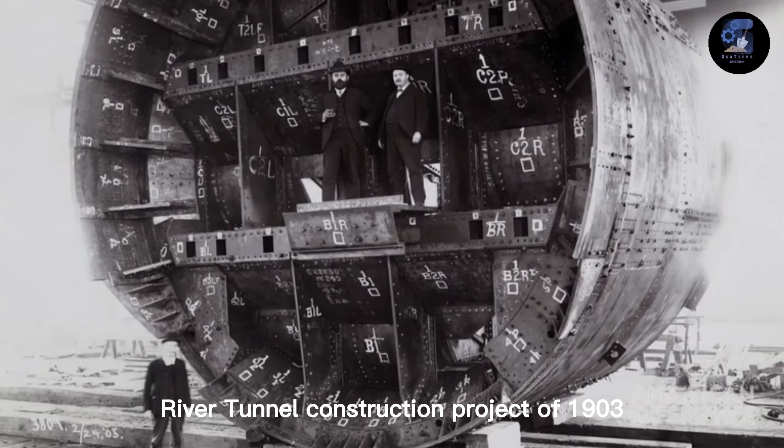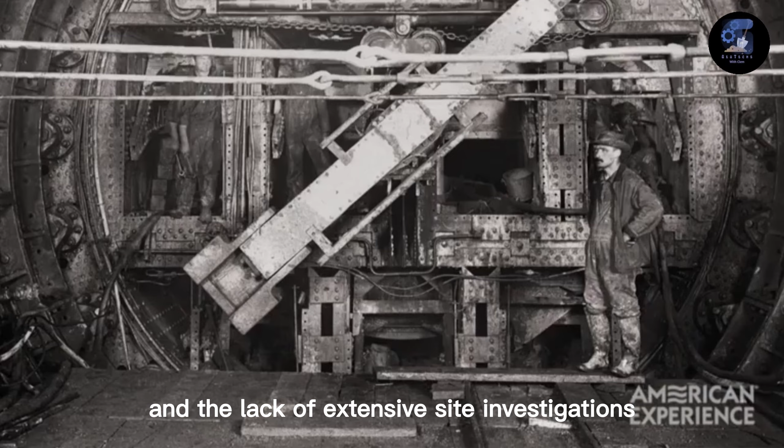This is the East River Tunnel construction project of 1903 in New York. The construction commenced in 1903 and the tubes were completed by 1907. But due to the lack of knowledge of modern-day soil and rock mechanics and the lack of extensive site investigations, the project faced various construction accidents and some engineering errors that required part of the tunnels to be rebuilt.

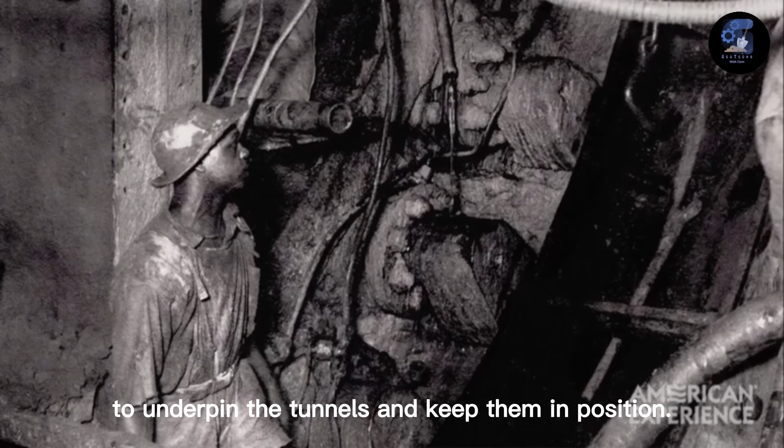Some segments of the tunnels were sinking into the marine clay. This forced the engineers to drill some micropiles to underpin the tunnels and keep them in position. Fast forward to today. With all of our technological capabilities, subway construction is still regarded, for lack of a better word, risky business. However, the demand for these complex projects is only getting higher.

The United Nations is projecting that the urban population will reach 60% of the world's population by 2030. So we can see with the increase of this urban population, the demand for public infrastructure is going to explode. In order to cater for these demands, there's going to be a high need for this underground infrastructure.

My name is Clemens. Today I'll be talking about the roles played by geotechnical engineers in the design and construction of subway systems. And this is Geotechs with Clemens.

Let's get right into it.

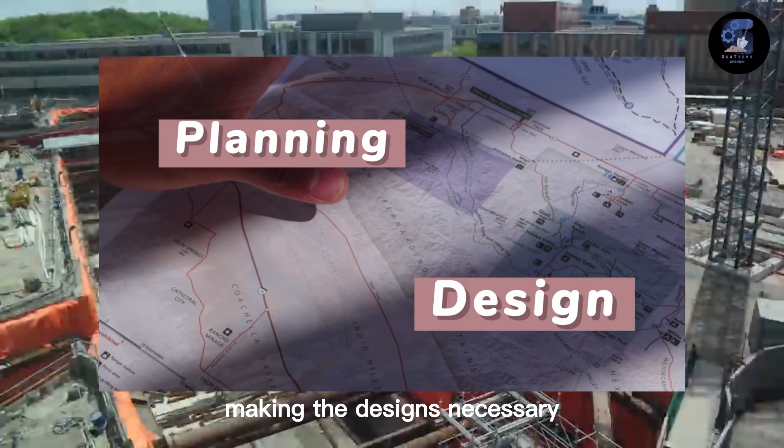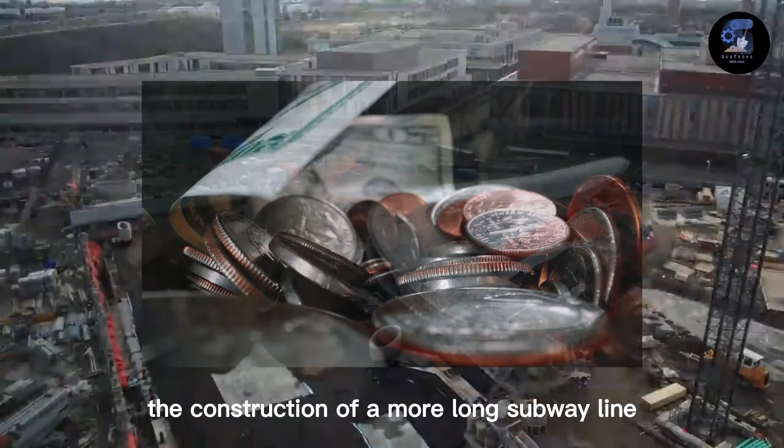Subway construction projects are long-term projects. A single project can take years, if not decades, from planning, making the necessary designs, acquiring the necessary documents from the government, and raising the funds. Usually these projects are financed by public and private funds, or a combination of the two. The construction of a mile-long subway line costs around $250 million to a whopping $1 billion.

One thing to keep in mind about these projects is they don't happen in a vacuum. They involve the collaboration of different entities spanning from government ministries, design companies, contractors, to legal teams to handle the contractual agreements. These projects are long-term projects and they are usually divided into 5 phases.

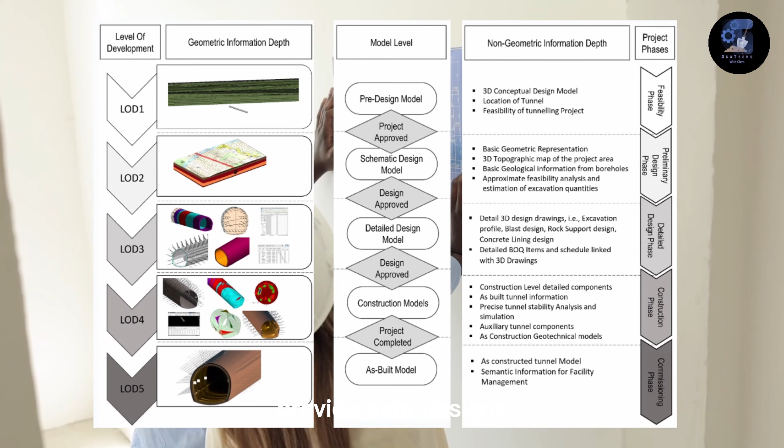Geotechnical engineers are heavily involved in all subway construction project phases. The importance of geotechnical engineers is to understand the ground conditions, provide safe designs, and provide construction sequence reports. Another reason is geotechnical engineers have to make sure that they preserve the surface, public and private infrastructure during and after the construction of the subway.

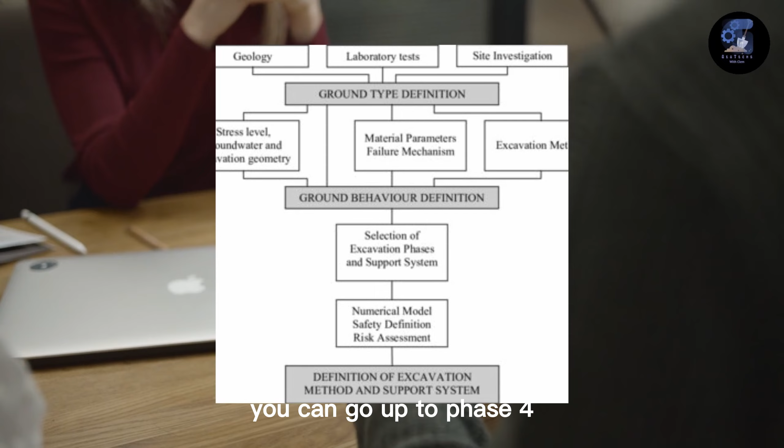Another thing to note is geotechnical investigations are iterative processes throughout the project cycle. For example, you can go up to phase 4, which is the construction phase, and you have to go back to phase 3 because you have to correct some of the documents or you have come across some unexpected geologic conditions.

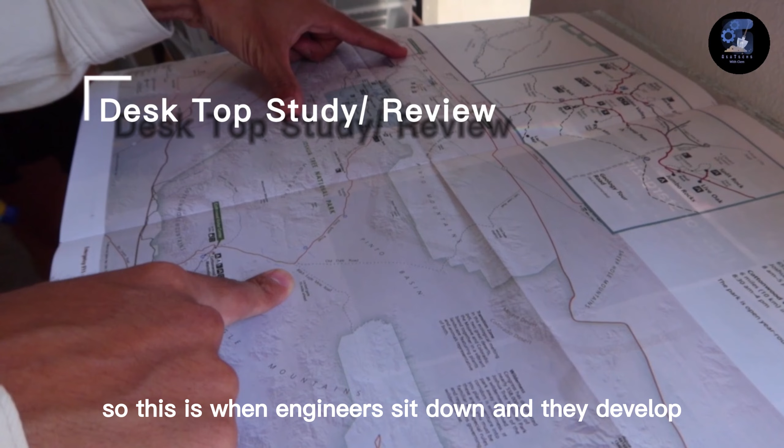Phase number 1 is called the planning phase. This is where geotechnical engineers do the desktop study or the review process. So this is when engineers sit down and they develop conceptual geologic or geotechnical models. That is producing some cross sections and preliminarily identifying some technical constraints and issues that might arise in the project. Moreover, in this phase, this is when geotechnical engineers plan subsurface investigation programs.

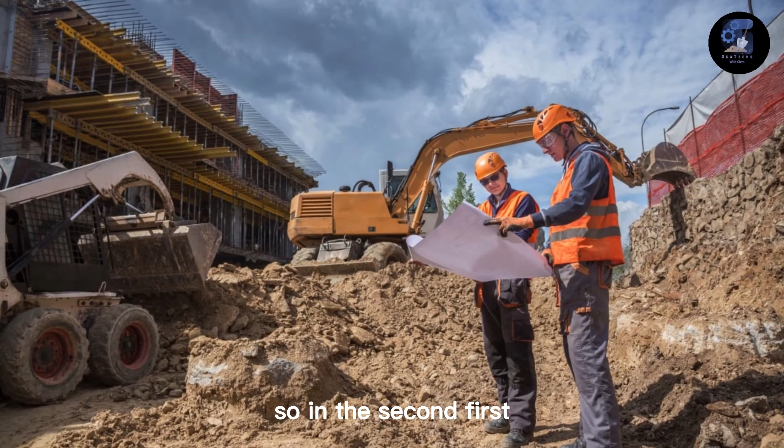So in the second phase, which is known as the preliminary or the feasibility design stage, this is where geotechnical engineers initiate field investigations, implementing the field drilling, for example, the CPT test, which is known as the cone penetration test, and collect samples and do some laboratory testing programs. The scope of this phase can often change based on the findings during the investigation.

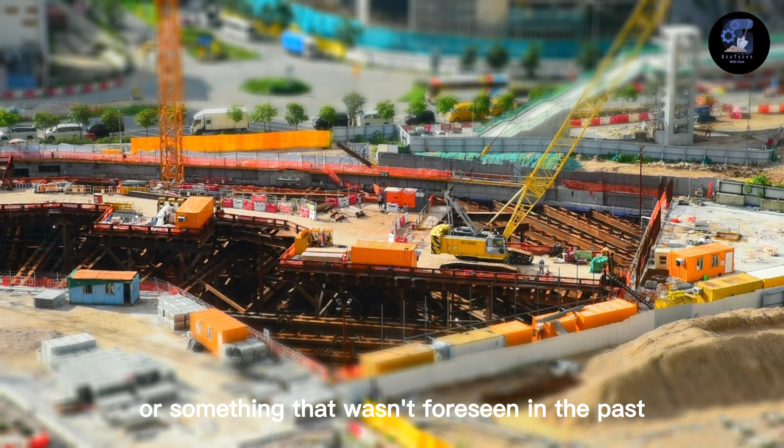For example, if the geotechnical engineers come across some uncertainties or something that wasn't foreseen in the past and it needs a different type of equipment, that might usually take some time to acquire from a contractor or a third party. During this phase, this is often where the bulk of the site characterization effort is applied to make sure that they create the closest representation documents of the construction site.

Phase 3 of the project cycle is called the final design, with some additional or follow-up field investigations. So in this phase, usually targeted specific geological or geotechnical features or issues that may impact the project design are the ones which are usually focused on. Geotechnical engineers have to produce geotechnical reports, that is, the data reports, design reports, and baseline reports that are required to initiate the construction of the project.

With that quote in mind, the construction phase of the subway tunnel is the most challenging part. In this phase, we are talking about the logistics, monitoring, and facing unforeseen challenges that may dramatically slow down the progress of the project. To give you a better perspective and understanding of the construction phase, we can look at a construction project of Line 1 of the Naples underground subway system. This subway line is 30 kilometers long, consisting of 25 stations transporting 500,000 people a day.

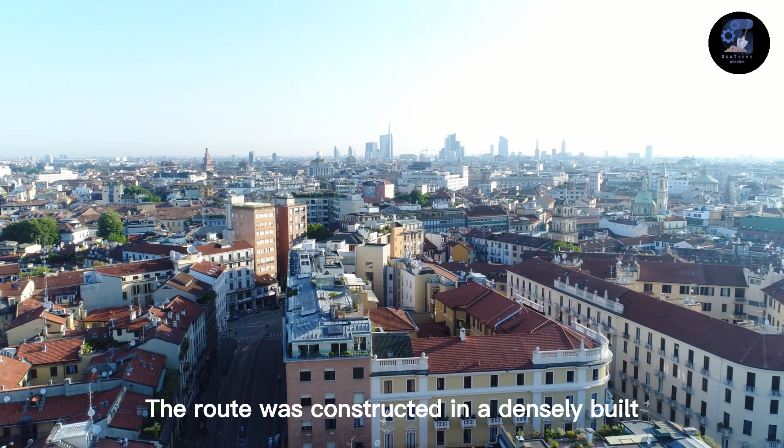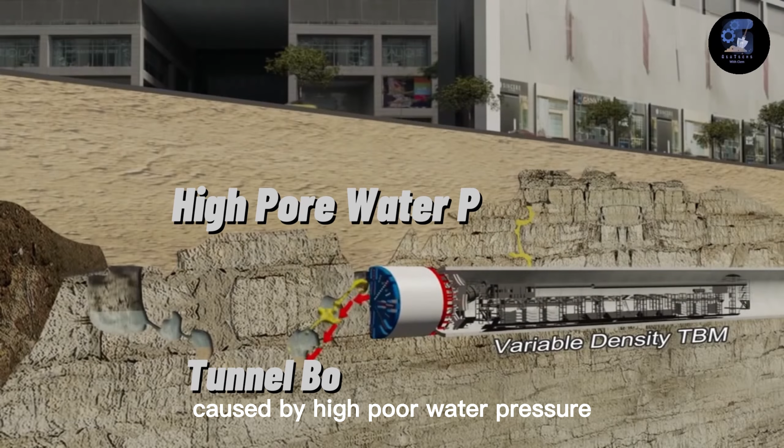The route was constructed in a densely built urban environment with historic and artistic buildings that should be preserved at all costs. One of the greatest drawbacks of the project was the fact that the line was well below the groundwater table. In order for geotechnical engineers to tackle the problem caused by high pore water pressure, the contractor adopted the closed-shield earth pressure balance machine to bore the tunnels.

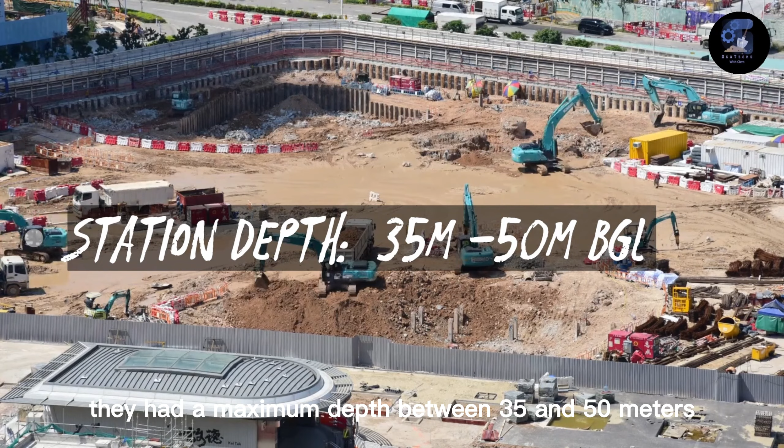As for the stations along the route, they had a maximum depth between 35 and 50 meters below ground level. They were constructed using excavation within 1 meter thick reinforced concrete diaphragm walls, supported by steel tubular props at the surface and several pre-stressed anchors to stabilize the retaining walls from collapsing.

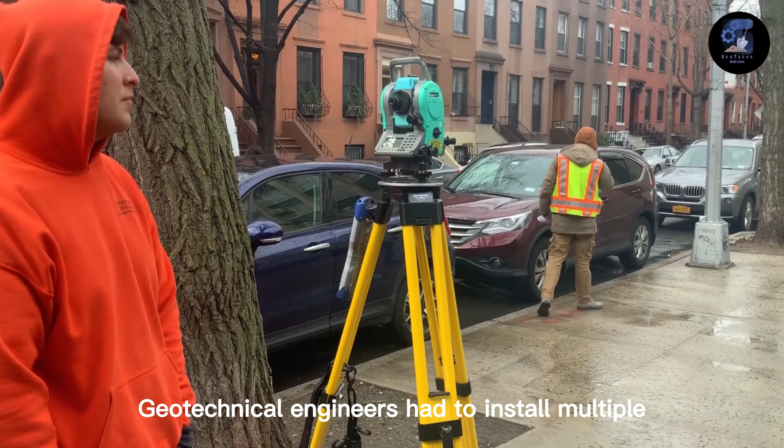Due to the closely located buildings around the construction site, it was highly important to minimize movement of the station diaphragm box and to reduce the potential settlement of the adjacent buildings. Geotechnical engineers had to install multiple real-time measuring instruments to monitor any distortions in the retaining wall and ground settlement.

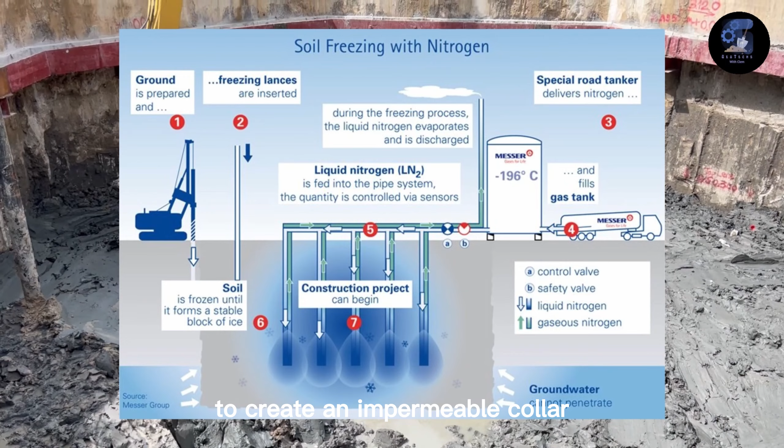In order to construct the platform tunnels and the connecting passageways, the construction was carried out with the aid of artificial ground freezing to create an impermeable collar parallel to the tunnel length. The frozen collar serves a static purpose for the inclined tunnel and waterproofing purposes for both the platform tunnels and passageways, providing a safe working environment and minimizing water ingression.

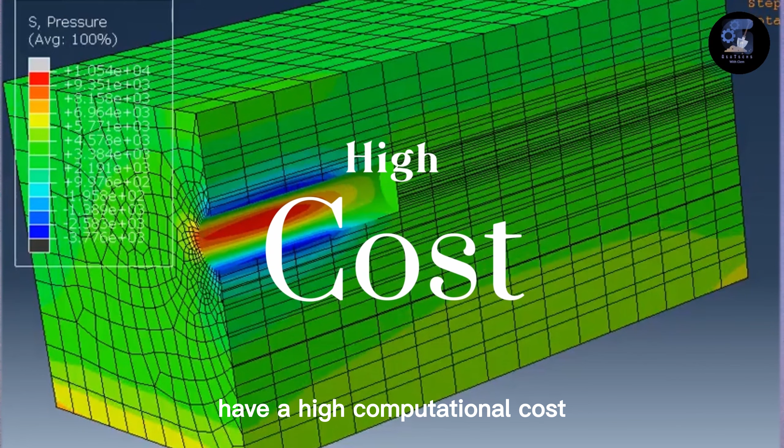In order to make future predictions of the construction project, a numerical analysis had to be implemented. Numerical analysis for such complex projects has a high computational cost, and geotechnical engineers have to know exactly how to use these numerical analysis softwares. There are many factors that geotechnical engineers have to take into consideration. For example, in order to have accurate numerical predictions of the ground movements associated with the excavation, the choice of an adequate constitutive model to represent the soil mechanical behavior is really important.

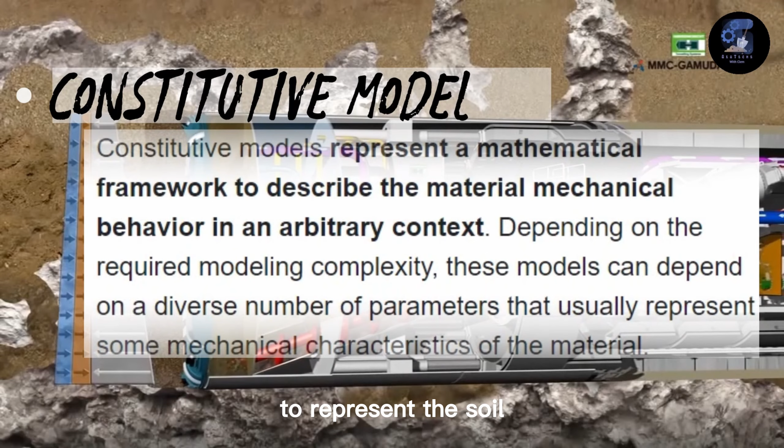Furthermore, there should be a correct definition of the soil profile. This comes back to the data which was collected during site investigation. The geotechnical engineers should have a clear understanding of the groundwater conditions and the initial stress state of the soil. Moreover, the representation of the structural geometry and the boundary conditions should be implemented appropriately, and the modeling of the sequence of the construction phase must be feasible.

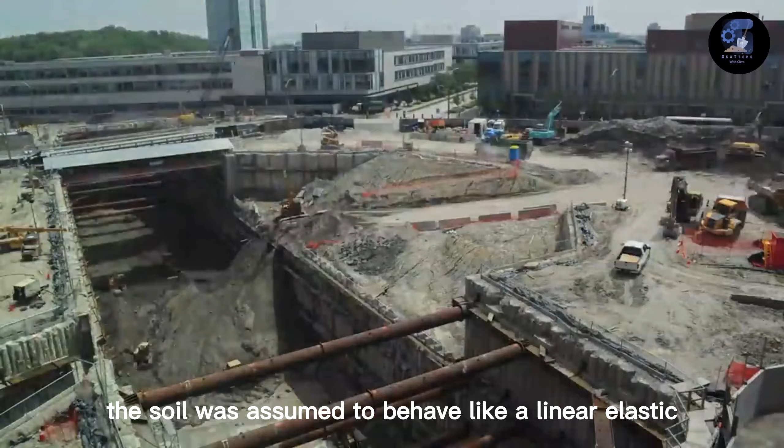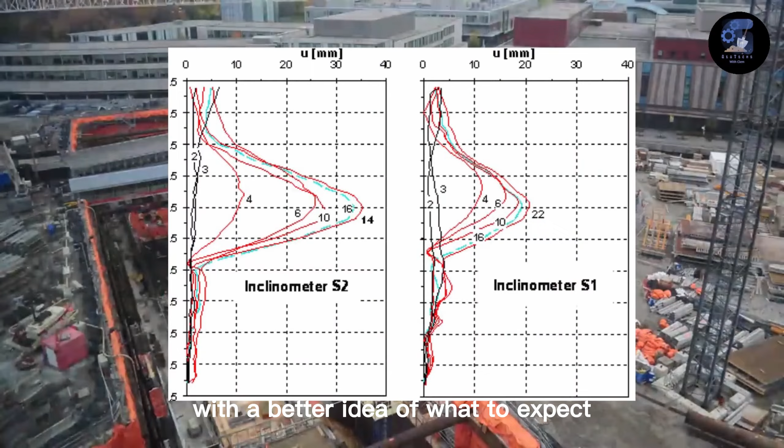In this project, the soil was assumed to behave like a linear elastic and perfectly plastic material with a Mohr-Coulomb failure criterion, whereas the diaphragm was modeled as a linear elastic solid. The numerical simulation provided the project crew with a better idea of what to expect during construction and provided the benchmark values for the surrounding building settlement.

It's one thing to use public infrastructure, and it's another thing to take a look and appreciate the work and the cooperation put forward to see through these amazing projects.